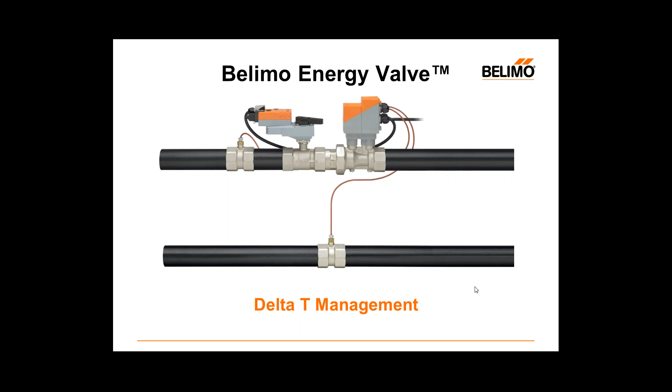So let's get started. What is the Belimo Energy Valve? If you're completely new to this product, the Belimo Energy Valve is an electronically pressure-independent control valve, and it has an integrated BTU meter in it. And what this allows us to do, a handful of things. Obviously, with a BTU meter in place, we're able to measure energy and get a much more precise read on what's happening at whatever piece of equipment we put this valve on, so our air handlers or fan coils or heat exchangers or what have you.

It also allows us to be pressure independent or temperature independent using either flow control or power control. We'll have a webinar later this year that delves more deeply into those two features. And then the third thing that we're really excited about with Energy Valve is Delta T Management. And Delta T Management essentially allows you to use less water to create the same amount of heating or cooling in your space by promoting a more efficient heat transfer process at your coil. And that is going to be the focus of today's discussion.

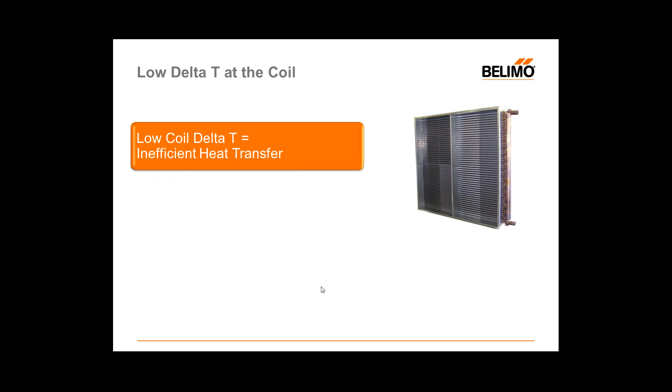Let's start talking about low delta T and what it really means when we sense low delta T at the coil. If we have a low delta T at the coil, it's an indicator that we have an inefficient heat transfer process. And what that really means is we're using more water than we need to satisfy the BTU demand of the load. And so the other way to look at that is that we've increased our flow rate, but we haven't increased the amount of BTUs that are being exchanged into the space.

And when we increase our flow, we obviously create a handful of issues in terms of energy. Most simply, we need to have more pump horsepower used. We need more flow. We're creating more pump head, so we're taxing the pumps. But we're also going to get a reduction in the efficiency of the plant itself. And so there's a couple of places where we would be concerned about consuming additional energy.

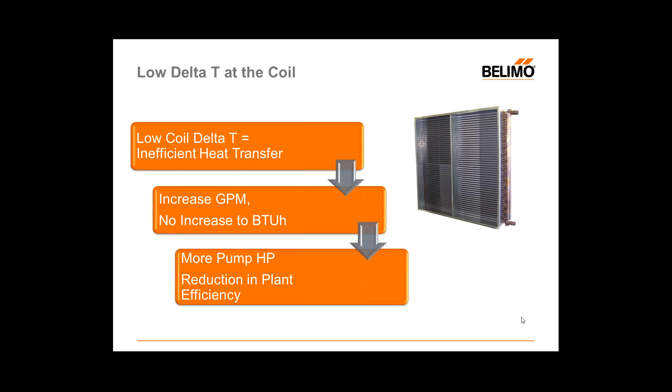And if you think about how a coil is designed, or how it functions rather, this actually makes pretty good sense. A coil's a long piece of copper tube essentially, and we're going to take some really cold water in this case, as it's a chilled water coil, and if we put it through that coil really slowly, each molecule of water takes a long time to pass all the way through the coil and come out the other side. And so it has a substantially longer period of time in which it could exchange its heat.

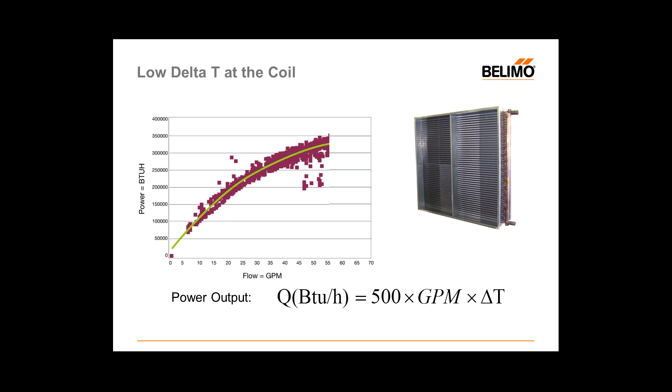This heat exchange process is governed by this formula, and most people in this industry are fairly familiar with it: the power output in BTUH is defined by 500 times the flow rate in GPM times the delta T in degrees Fahrenheit. So to really understand the exchange of BTUH to flow, we need to also examine how delta T plays into this. So we'll now plot delta T on this graph as well.

So what low delta T really means at a coil is that you didn't expend the energy in that water efficiently. So we spend a lot of money to make our water very cold. We put it through our coil, and maybe it's supposed to come out 12, 14, even 16 degrees warmer than we put it in, but it only comes out 8, 10, or 12 degrees warmer. Well, then we didn't use all of the energy that was available to us in that water, and that's why we talk about inefficient heat transfer at the space.

What's most interesting to look at is what would happen if we put even more water through this coil. What we're looking at right here is actually a fairly good heat exchange profile. But if we continue to flood more water into this coil, three things happen, and all of them are kind of bad for us. The first thing, obviously, is that we're pumping more water, so we're going to increase our cost of pumping. The second is that we continue to decrease our delta T performance, and the third is that we stop producing additional BTUs in the space.

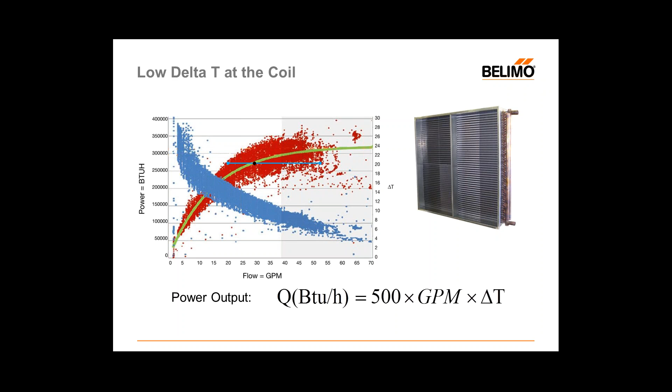It's not just a full flow, full load problem, because a lot of places don't run at high load demands all the time, but you can still generate low delta T's even at partial load, especially in the shoulder seasons where our production of cooling is much higher than the load demand in the space, and we wind up with low delta T's then. That can be really tricky to diagnose in a central plant type environment.

Let's talk about what the potential impact of this energy savings would be if we could take a look at it both from the pumping perspective and the plant perspective. So let's start with the pump. And we'll take our clean looking curves and we're just going to pick 2 points which we could control to relatively the same amount of cooling here.

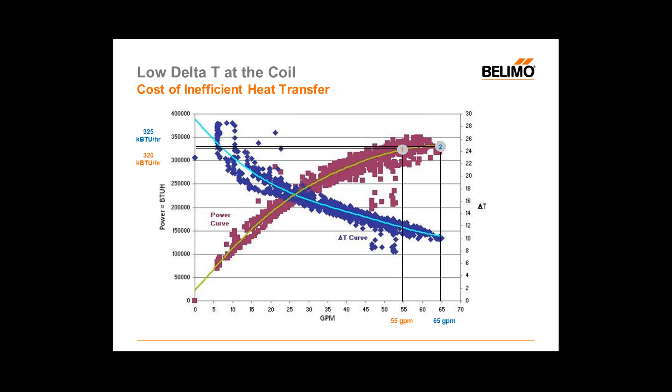So point 1 on my graph uses about 55 gallons a minute, and it produces about 320 kBTU per hour. And so the second point on there, point 2, is closer to 65 gallons a minute, so about 10 GPM more. And we only produce about another 5,000 BTUH. So we're going to say that that 5,000 BTUH is somewhat negligible, but we'll take a look at how this breaks down statistically and what we spent to achieve this more heat exchange.

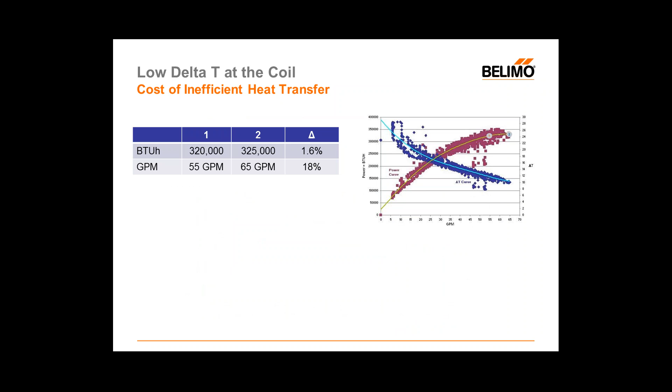So basically, percentage-wise, we gained less than 2% more BTU by spending 18% more GPM to get there, which begs the question, how many dollars does it cost to pump 18% more water? And in order to understand this, we're going to take a look at what's known as the Pump Affinity Law. The Pump Affinity Law draws a relationship between the ratios of GPM, pump head, and pump horsepower, and scales them together. And basically, if you want to know what the increase in GPM versus the increase in pump horsepower is, you have to apply the ratio here, which includes a cube.

And so 18% more water actually could wind up costing you in the neighborhood of 65% more pump horsepower or pumping dollars. And that's why we want to look at this. Because of that cubic exponential that's in there, small changes in the amount of flow percentage-wise can actually net us a fairly substantial amount of savings. So this would be the big way we could essentially start shifting our pumping costs lower.

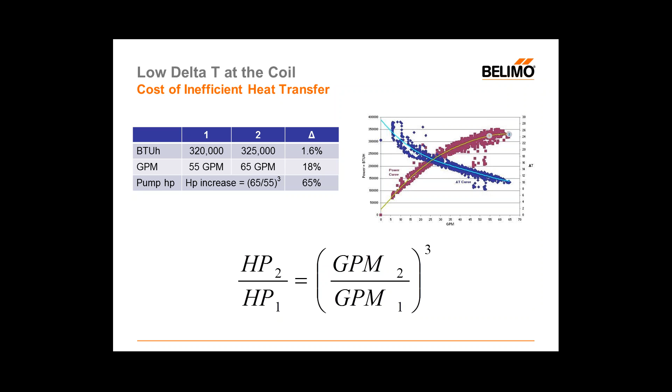In this case, 2% more cooling or 1.6% more cooling is costing us 65% more dollars. If we had the ability or the knowledge to know that and make a decision about it, I don't think anybody would agree that that's a good investment. So if that's what's going on at the pump, what's going on at the plant? Well, let's talk about chillers first.

Chillers are an interesting piece of equipment, and there's probably a ton of you on the call today that know a lot more about chillers than I do. But I think one of the things that we can say is that chiller plants are simply more efficient if they're operated at their design delta T than if they're not.

And the reason I'm making such a generic and cryptic statement is that the impact of low delta T on a chiller is highly dependent on the chiller. So if you give me a 25-year-old screw chiller, I'm going to show you a huge energy penalty for operating it at a low delta T. If you show me a brand new high efficiency chiller that was purchased last week, I'm going to show you that it's much more versatile in terms of its efficiency operation with delta T.

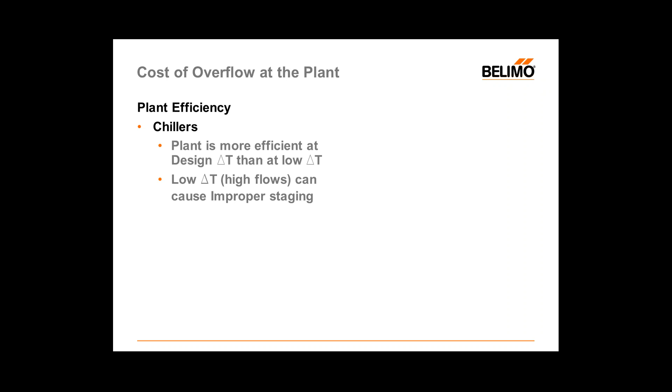And so I don't want to really get into a deep discussion about that, except perhaps on a case-by-case basis. But again, it's going to work better if you give it what it's designed for than if you didn't. The other thing that's more tangible, though, is that if we have low delta T, which will cause these high flows, it can cause my chiller to stage improperly, and we should take a look at that, because this would be a little bit more universal if you're running a plant that has multiple chillers.

Let's just say, as an example, we have 2 chillers, and they're 500 tons apiece, so I have a 1,000-ton capability on my plant. And we'll say right now that we have a 500-ton load. And so we would have one chiller loaded at 100% to get this 500 tons. If we take a look at the GPMs, we see here on the left that GPM, this is just a reformulation of the 500 times GPM times delta T, except we've changed from BTUH to tons of cooling. We have GPM equaling tons times 24 divided by delta T in degrees Fahrenheit.

If we say that this is a 12-degree chiller and that it requires 12 degrees of delta T, if I'm at design, 500 tons of cooling nets 1,000 gallons a minute. What happens, though, if I have a low delta T? Let's say I go to 8 degrees of delta T. What does my flow look like? Well, because flow and delta T are inversely proportional when my load is fixed, this big of a reduction in delta T causes a huge increase in GPM, and in this case, I now require 1,500 gallons a minute.

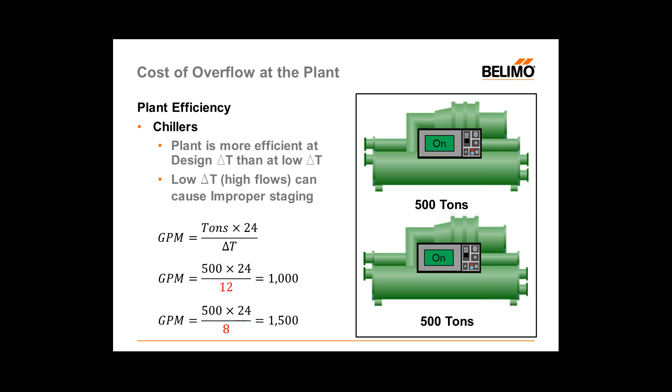And likely what has happened is that I have staged a second chiller because I need additional pumping capacity to get to 1,500 gallons a minute, even though I didn't need my second chiller to increase the load capacity of my plant. And so this is what we talk about when we say improper staging. Oftentimes you can wind up running extra equipment without your input, so to speak. It just sort of happens as a course of the way the pumping strategy is written. But the pumps are starving essentially, and so they request another pump, even though the cooling requirement isn't there.

If we're talking about heating, the biggest net benefit from a plant standpoint of delta T improvement would be on more advanced style condensing boilers. So a condensing boiler works by preheating the return water by creating a condensing process of the flue gas over the relatively cool water that's returning from your coil. In a traditional boiler, we would just have the second stage fire heating area, and we would not preheat the water. So the big function for condensing boilers is that the return water needs to be cool enough to create the condensation process in the first stage preheat. And so the lower the return water is, the higher the efficiency will be of your condensing boiler.

And so this graph that we're putting up here, it's coming a little slowly, there it is, is courtesy of ASHRAE, but each condensing boiler manufacturer is going to produce a similar type graph that shows the efficiency of your boiler based on your return. They call it inlet, but they mean inlet to the boiler. So for us, it's the return water temperature, and how as you get cooler and cooler, you get to the dew point inside of the condensing chamber, and then you can see there's a sharp increase in your efficiency.

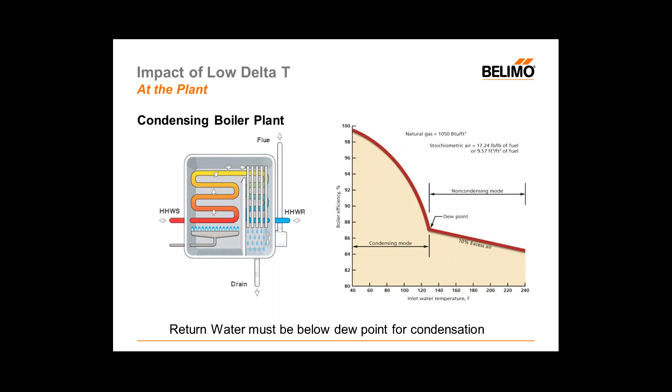So how does the Delta T Manager work? The Delta T Manager inside the energy valve essentially monitors the temperature before and after the coil at all times. And as it does that, it's looking for a low limit threshold. So as you program the energy valve, you're going to say this is a 12-degree coil, or we know we can get enough heat transfer for what we need to do at 12 degrees F. And so we're going to set that within Delta T Manager.

And so it will monitor and say, as long as we're above 12 degrees F of delta T, the valve can operate in response to the automation system. But if we violate that low limit threshold, in other words, if we get below 12 degrees of delta T, and it has to be significantly enough below that we're going to register. So if you go to 11.9, the energy valve's not going to do anything.

But let's say in this case we get down to about 10.5 degrees of delta T. The energy valve with Delta T Manager engaged will suspend control of the automation system, and it will start to reduce its own flow until it has satisfied the 12 degrees of Delta T.

And so in this case, we'll put a couple animations together here. I know this is a little slow for some of you, but let's say we have our overflows here, and then we're going to drive the flow lower. And as we do this, we raise the Delta T, and you can see at the top, we're trying to maintain the same amount of cooling into the space.

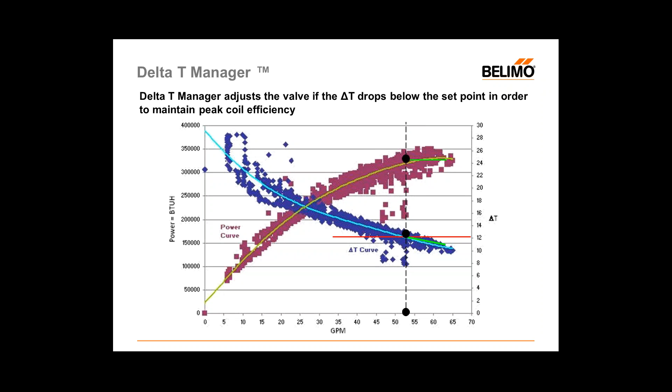So this question comes up quite a bit, especially when I talk to contractors. Everybody gets a little fidgety when I say, hey, we're just going to ignore the control signal. So how can I let Delta T Manager limit the flow if it doesn't measure the discharge air temperature? What about the comfort of the space?

And again, when we talked about the overflow, when we talked about generating low delta T, we said that that functionally caused 3 problems. One of them was we pumped too much water. The second one was that we had a low delta T problem. And the third one was that we produced no additional BTUs. So if we're able to just slice off the portion of the curve where no more BTUs are produced, well, then we shouldn't have any adverse impact on room comfort. And again, you have to make an educated and smart decision about setting your Delta T set point so that you won't run into this type of trouble.

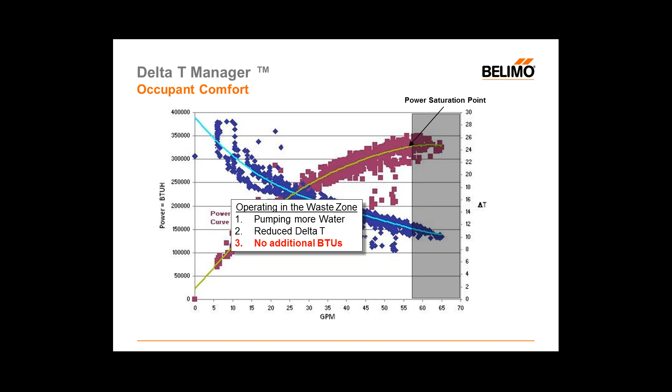All right, so that's how it works. Functionally, the question is, does it really work? Can I save energy with this? So let's take a look at a few case studies that Belimo has put out. We have documentation available on energyvalve.com on all of the case studies we're going to present here today. But let's walk through them.

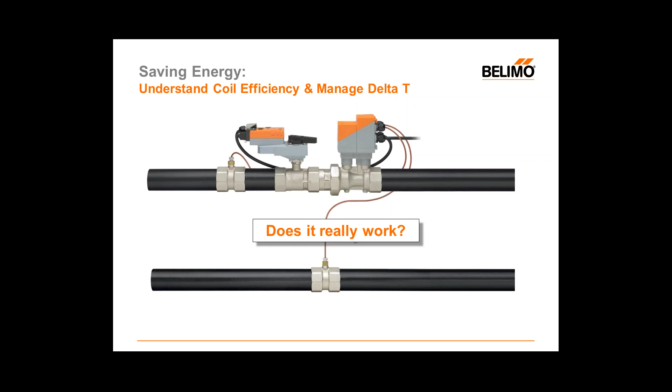The first one we're going to talk about is MIT University in Boston. So MIT has a particularly difficult low delta T problem on their campus. And they engaged us with the energy valve to do a pilot project in one of their buildings, which was the Hayden Library. And the Hayden Library is about 150,000 square feet. It was built in the late 1940s, and we retrofitted 6 of the 7 air handlers that were in that space, which were getting an average coil delta T of just above 6 degrees F.

So for transparency's sake, the building was designed originally in the 1940s with a dedicated 6-degree chiller in the basement of this building. And that chiller was removed when the building was put on the central cooling loop, which was fueled by a 12-degree F cooling plant.

But obviously, or maybe not obviously, but factually, they did not pull all of the 6-degree coils out of all of the air handlers, and so they wound up having some difficulty matching a 12-degree chiller with some 6-degree coils. So basically, it had very large coils, taking a lot of water to create the cooling, and the energy valve was put into place to see if we could slow that water down and demand higher delta T and still satisfy the spaces. So we had a great success there.

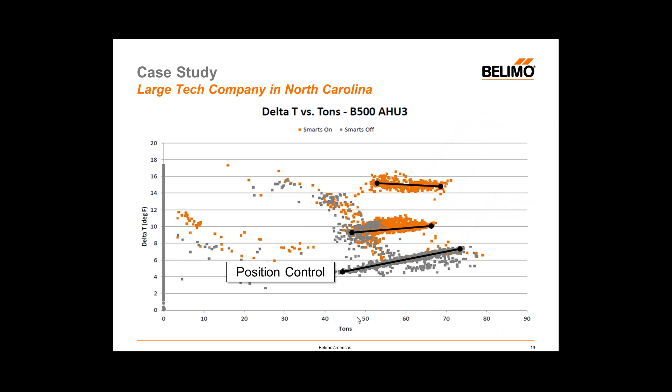A couple of weeks went by and they changed their control strategy from position control to what we call flow control, where the control signal is now controlling how many GPMs of water go through that coil. So this would be in line with your pressure independent type control valve.

And so now they have similar load range. It's a couple of weeks later, so the loading's not exactly the same, but we're still in that mid 40s to, in this case, high 60s tons range. And they're doing it on average at about 10 degrees Delta T. So if they were averaging 6 before, now they're around 10, which is a sizable improvement.

A couple of weeks go by and they engage Delta T Manager. Now, with the Delta T Manager, there's a couple of ways to get your Delta T management set point. In this case, they just sort of tinkered with it. They probably set it at 12 and saw they could meet demand, and then they tried 13, 14, 15, 16, 17. At some point, they found they couldn't cool the space. So they settled right around 15 degrees F.

And so now, with Delta T management in place, again, that's still between sort of 50 and 70 tons range, they're cooling the same space with the same equipment with significantly less water because they have a higher Delta T. So let's take a look at a single load point and try to quantify this a little clearer.

If we look at 60 tons of cooling, in position control mode, 60 tons of cooling was done at 6 degrees of Delta T, and if we use our tons, GPM times 24, all that stuff, we can calculate that 240 gallons a minute were required to create that 60 tons of cooling.

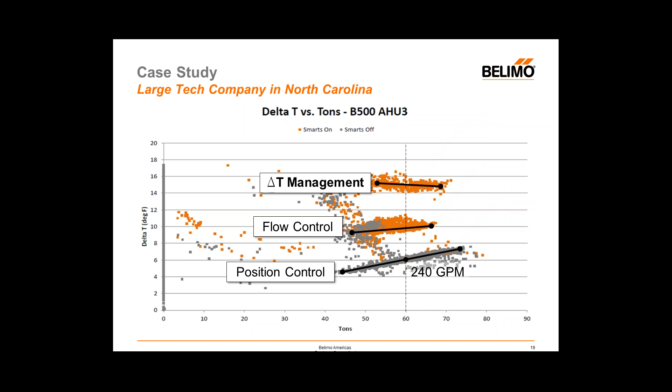In flow control mode, remember, it's the same valve on the same piece of air equipment. It's the same air handler, same valve, just a different control strategy at the valve. We didn't change the automation system at all either. Now we're at 10 degrees Delta T. 60 tons of cooling gets us almost 100 gallons a minute less to create the same amount of cooling.

And then when we put Delta T management in place, we're now down under 100 gallons a minute. So 96 gallons a minute where we started at 240 gallons a minute to cool the same space, the same amount with the same equipment. So we used 40% of the original volume of water to cool the same space, the same amount. And so that's why we're really excited about this technology.

Now, granted, in this case, we started with an air handler that was running a 6 degrees Delta T, and it probably had a 16-degree coil in it. So we had a substantial problem which we could correct. But the impact shows that the physics behind this is valid. We can use less water in a lot of cases to meet the same demand.

So the one last thing I want to remind you about before we close out and go to the question and answer session today is that the energy valve is not sort of magical. It doesn't make your coil behave better than its design. What it allows you to do is operate your coil at its design. What we see most places is that we have 16-degree coils in place that are operating at 8, 9, 10 degrees F, and then I have a 16-degree chiller plant that's running at 8, 9, 10 degrees F.

All we're doing is taking the equipment and forcing it back to the conditions in which it was specified in the first place.